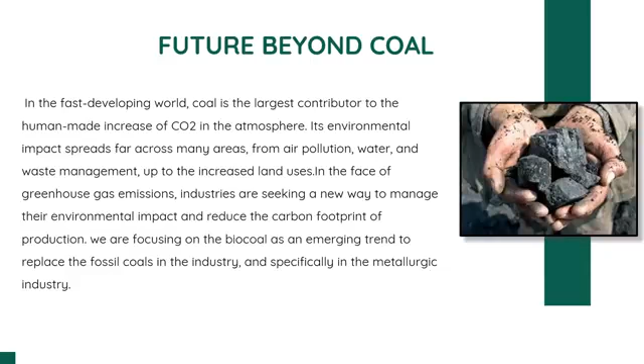In the fast developing world, coal is the largest contributor to the human-made increase of CO2 in the atmosphere. Its environmental impact spreads far across many areas, from air pollution, water and waste management, up to the increased land use. In the face of greenhouse gas emission, industries are seeking a new way to manage their environmental impact and reduce the carbon footprint of production. We are focusing on biocoal as an emerging trend to replace the fossil coal in the industry and specifically in the metallurgical industry.

So what is biocoal? Biocoal is a carbon neutral fuel that can replace fossil coal in industrial processes. It is also termed as biomass briquettes. Biocoal briquetting is the process of converting solid agricultural waste into high density and energy concentrated fuel briquettes. These briquettes are also called white coal, which are a ready substitute for coal and wood in industrial boilers and brick kilns for thermal application.

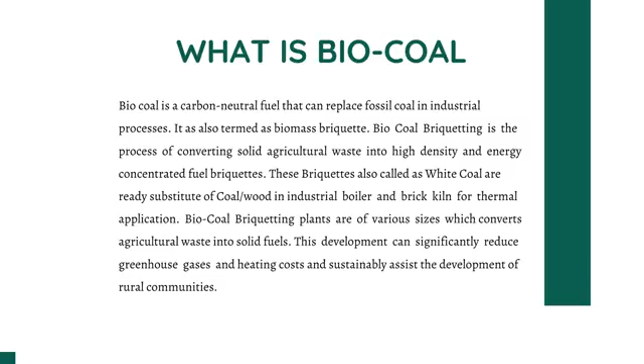Biocoal briquetting plants are of various sizes, which convert agricultural waste into solid fuels. This development can significantly reduce greenhouse gases and heating costs and sustainably assist the development of rural communities. Biomass briquettes or biocoal is highly compressed without adding any chemical glue or binder. Thus, it's a binderless technology product resulting in 100% natural, eco-friendly solid fuel. Biomass briquettes are a renewable source of energy and avoid adding fossil carbon to the atmosphere.

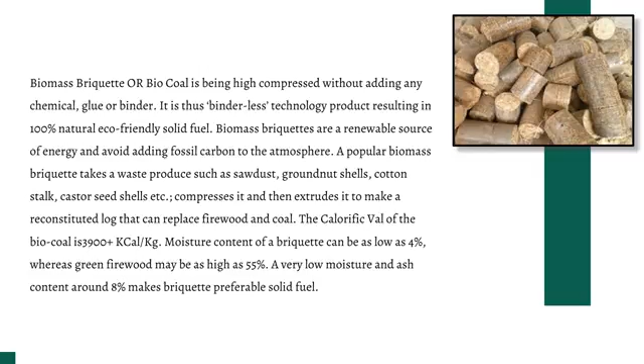A popular biomass briquette can take waste products such as sawdust, groundnut shell, cotton stalk, castor seed shell, etc., compress it and then extrude it to make a reconstituted log that can replace firewood and coal. The calorific value of the biocoal is 3900 kcal per kg. Moisture content of a briquette can be as low as 4%, whereas for firewood it may be as high as 55%. A very low moisture and ash content around 8% makes briquettes a preferable solid fuel.

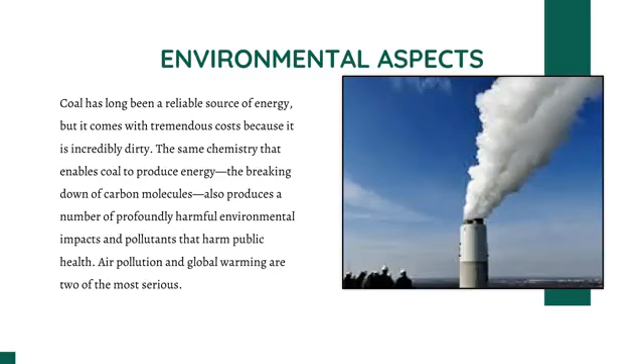Environmental aspects. Coal has long been a reliable source of energy, but it comes with tremendous cost because it is incredibly dirty. The same chemistry that enables coal to produce energy, the breaking down of carbon molecules, also produces a number of profoundly harmful environmental impacts and pollutants that harm public health. Air pollution and global warming are two of the most serious.

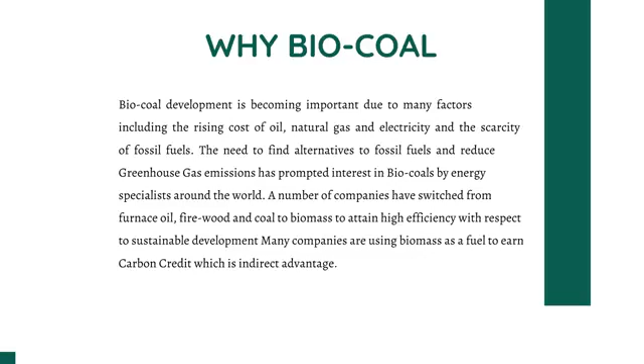So why biocoal? Biocoal development is becoming important due to many factors, including the rising cost of oil, natural gas, and electricity, and the scarcity of fossil fuel. The need to find alternatives to fossil fuels and reduce greenhouse gas emission has prompted interest in biocoals by energy specialists around the world. A number of companies have switched from furnace oil, firewood, and coal to biomass to attain high efficiency with respect to sustainable development. Many companies are using biomass as a fuel to earn carbon credit, which is an indirect advantage.

The process of biocoal production. Raw material is processed through a crusher and grinding machine, which is further dried and sent to a briquetting machine, where it is highly compressed and then cooled to form the finished product.

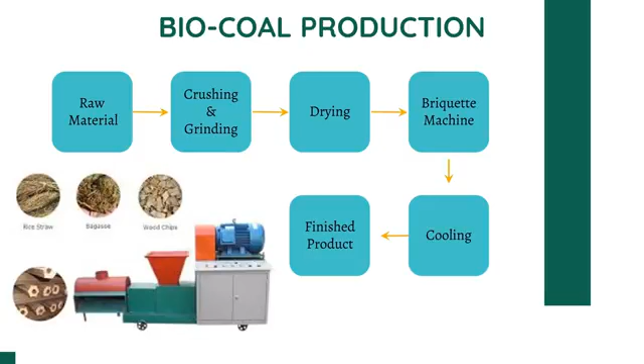Salient features of biocoal. It is easy to burn because of lower ignition temperature compared to coal. Smokeless burning, sustained combustion and the temperature requirement are achieved due to very efficient combustion. It leaves only white ash without any fixed carbon. Full heat value is utilized. Easy to handle, and 1000 kg of briquettes per cubic meter can be stored and transported against 50 kg of agro waste. No toxic gas and sulfur emission are its key features.

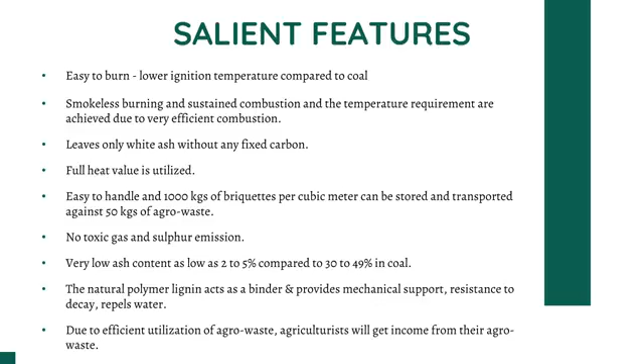Also, very low ash content, as low as 2 to 5% compared to 30 to 49% in coal. The natural polymer lignin acts as a binder and provides mechanical support, resistance to decay and repels water. Due to efficient utilization of agro waste, agriculturists will get income from their agro waste.

So, what are the applications of biocoal? Biocoal replaces the following conventional fuels that are used in mass quantities: diesel, kerosene, furnace oil, firewood, coal, and lignite. Various industries requiring heating applications in making their products can make maximum use of biocoal and also save the nation's foreign exchange, which is especially used for the purchase of crude oil.

Some industries that are using biocoal as a fuel source are the following: ceramic and refractory industries, spinning mills, solvent extraction plants, lamination industries, chemical units, leather industries, dyeing plants, and many more industries.

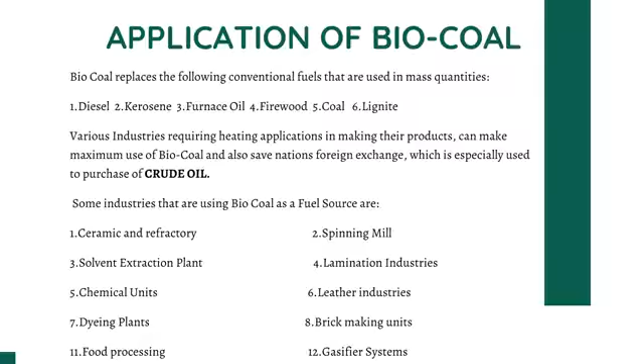So, what's the conclusion? Biocoal can be a great alternative to conventional fuels for sustainable development. It will also reduce our dependency on fossil fuel, which further will preserve our foreign exchange in purchasing crude oil from different countries. Further, it will generate income for farmers from various agricultural waste. Keeping these points in mind, it will definitely support the concept of Atmanirbhar Bharat.